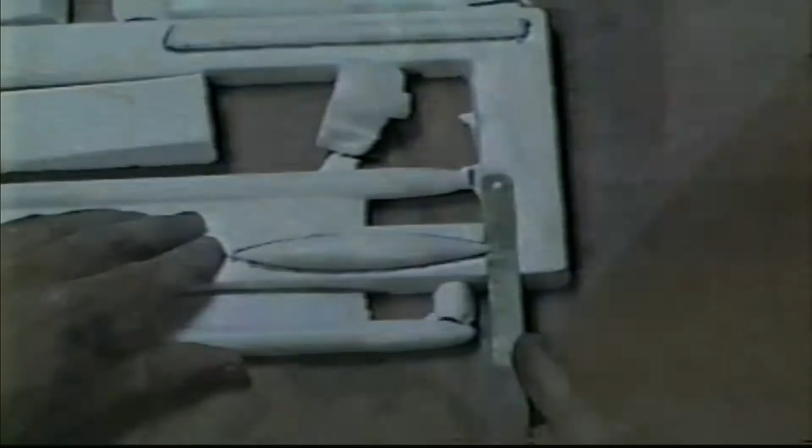Okay, let's cut the parts off. Let's start with our vertical. We're just using a regular old hacksaw blade. Alright, this is our elevator cap. The foam cuts real nice. Another elevator cap. Alright, there's our stick hand.

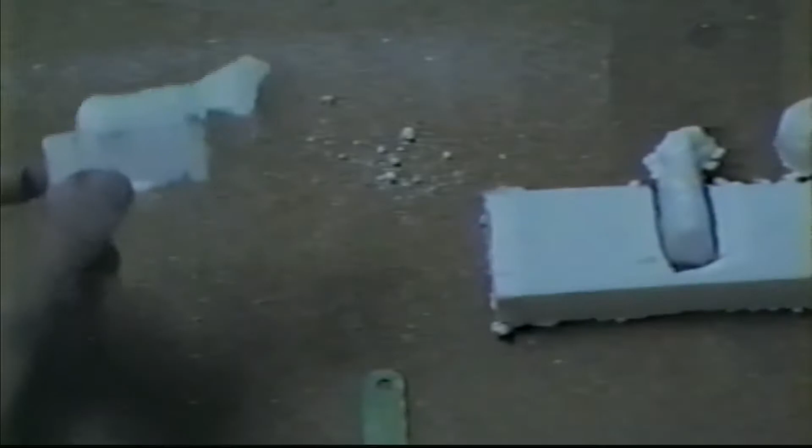Notice how we're cutting right next to the foam there. Alright, there's our line. We cut right there, and all we have to do now is just shape the arm. A little bit of sanding, and we'll have a cool looking hand.

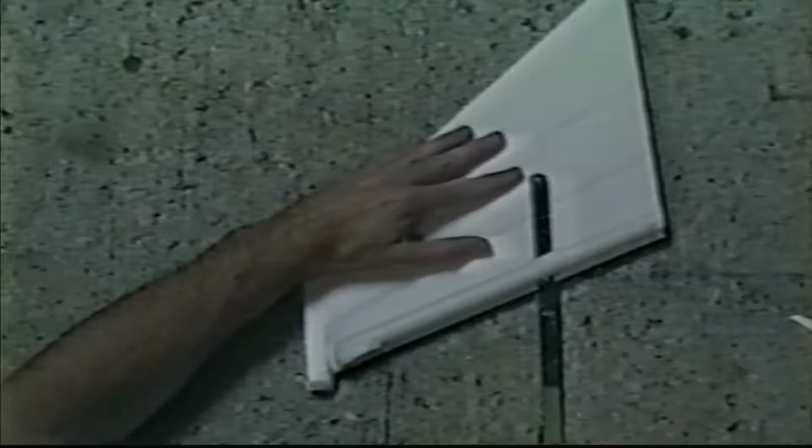Alright, let's cut the fill channels off our elevators. Careful you don't dig down too deep, because you're going to end up sanding it. We're using a 60 grit block with 120 on the other side. Cut all the fill channels off our ventrals.

And now let's clean everything up. Be real careful, don't change the shape here. That foam cuts real fast.

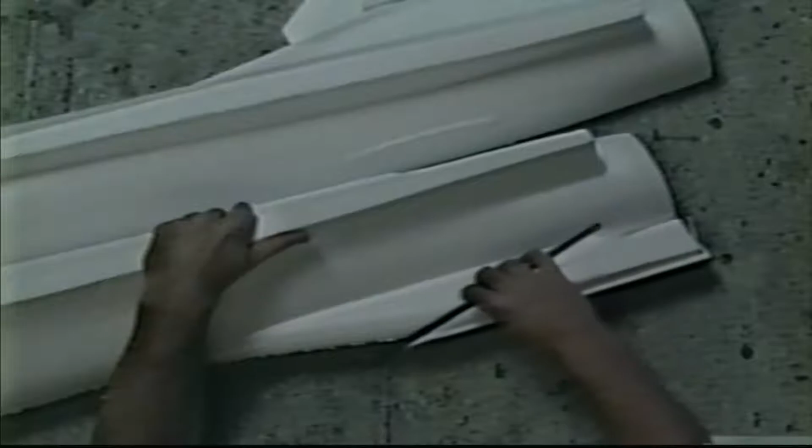Alright, any flash we have on the fuselage, let's go ahead and get rid of that.

Just a real light sanding. Alright, on the flat side of the fuselage, let's sand that up. We want that nice and smooth. Doesn't take much, just a little dab will do ya.

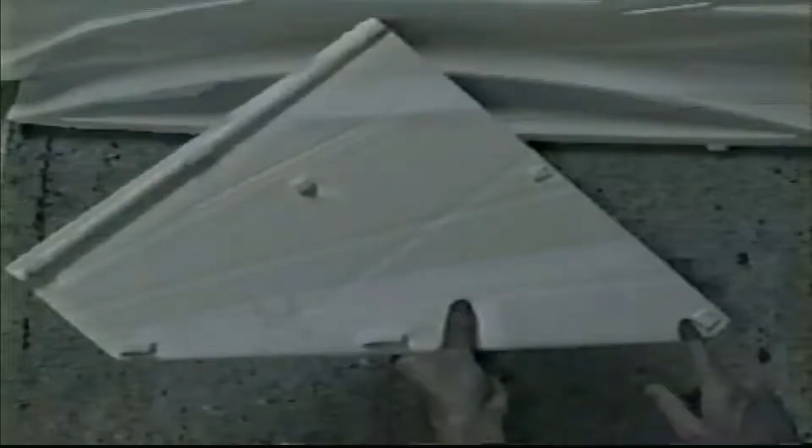Alright, these are our fuselage leveling blocks. Be real careful of these. Don't sand them off and don't cut them off. It's going to level up the fuselage later. Those are our wing leveling blocks. Don't cut those off either.

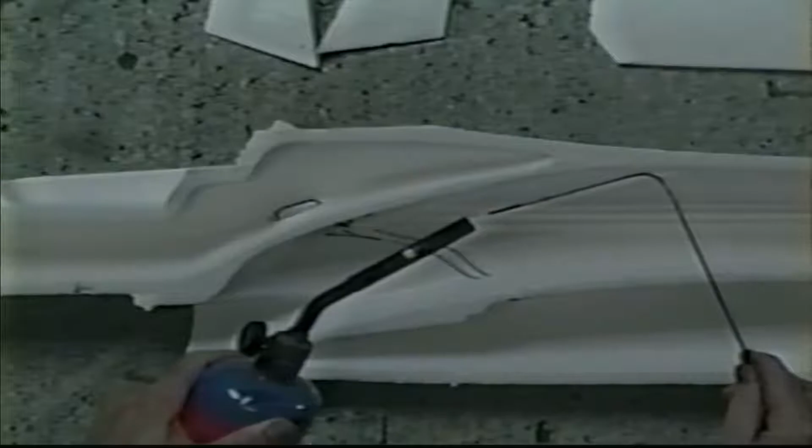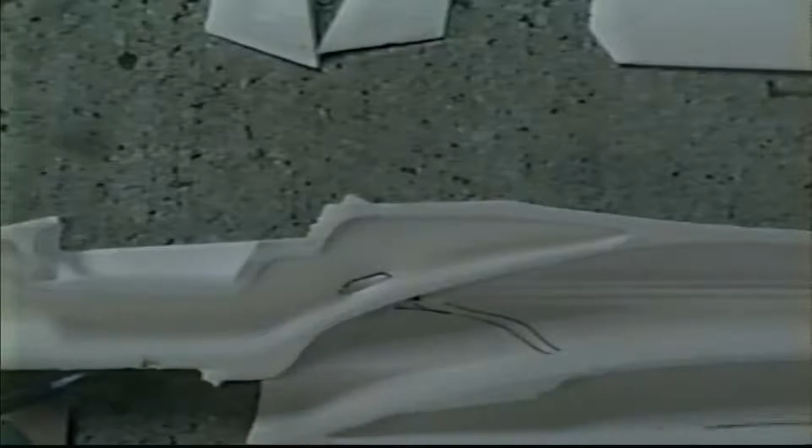Alright, using a torch and a hot wire, we got to melt some holes through the foam for our cables and our servo wire. Have a fan going for the smoke, as the smoke is kind of nasty. You got to be careful. You might want to test on some scrap foam because this foam cuts pretty fast.

Okay, this is for our fuel lines for later. We're working on the right side fuselage. We're going to melt all our holes right now so we don't have to mess with it later. Alright, melt them through for the cables on the other side of the fuselage.

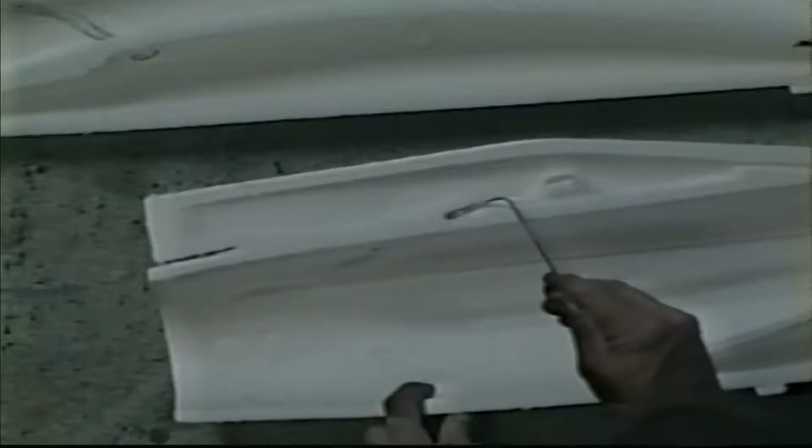Alright, this is our rudder channel. If you just get close, you're going to be in there good enough. Kind of just melt it all out.

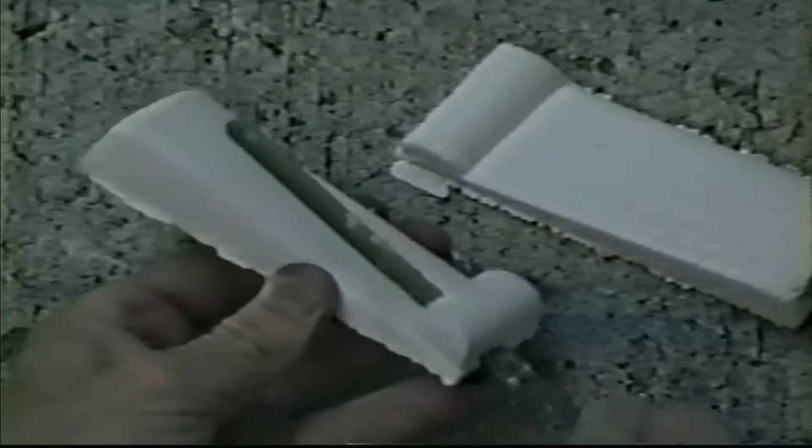Alright, let's cut off our fill channels for our air brakes. Note there is a left and a right side for these air brakes. Kind of clean them up.

Alright, using 5-minute epoxy, let's epoxy these things on. Use a ruler on both sides. Flatten it up and it'll be on. Okay, mark your center for your elevator and your aileron torque rods.

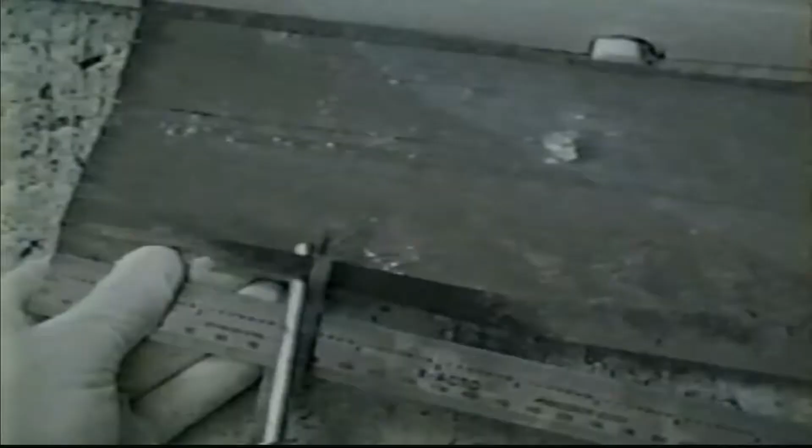Alright, check out this carbon fiber. This is some nice stuff. We got some Spectra string here also. Alright, that stuff is nice. Using your ruler, cut off some elevator strips and some aileron strips.

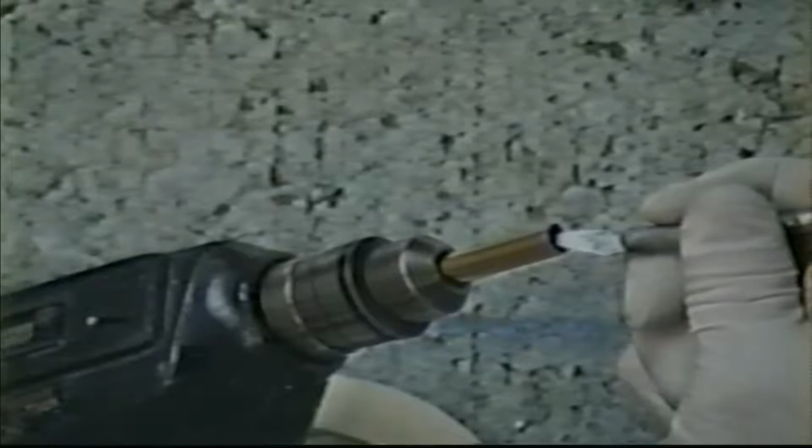Alright, using a 1/8 piece of brass, we're going to sharpen that sucker up with the X-Acto knife. And this is the large one for the elevator. That size is a 13/32. Alright, this is going to turn into a carbon epoxy bearing. We're going to build this plane tough, folks.

Okay, using 5-minute epoxy, let's spread some of that on the bearing here. Kind of squish it down real good. You want to get in between those fibers. Okay, place that over the hole that you marked earlier. That'll also lock in our air brake.

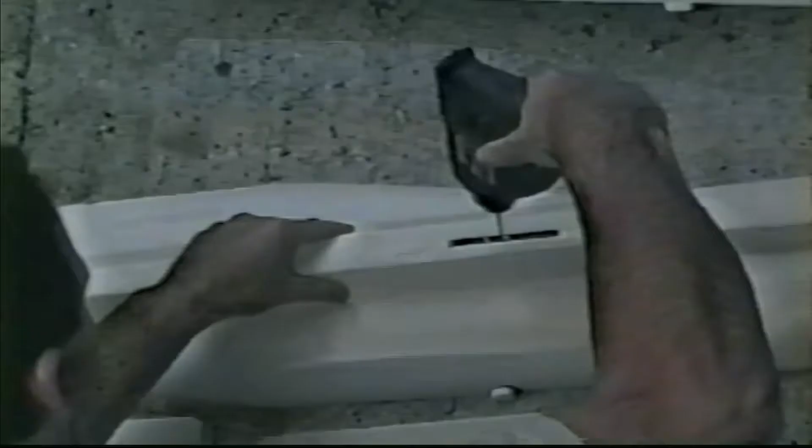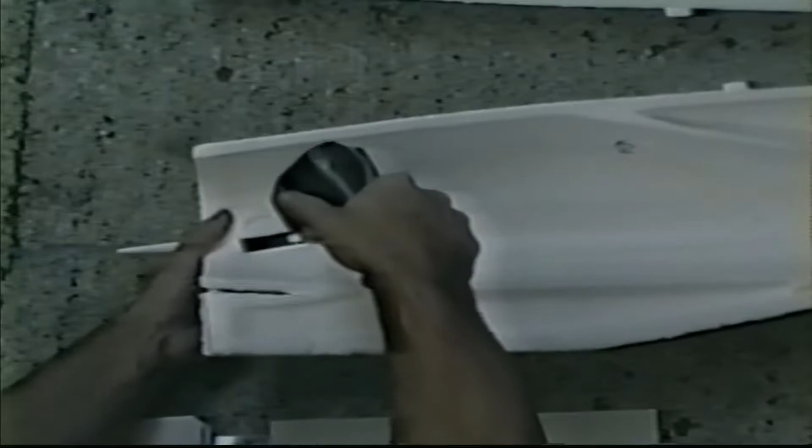Okay, we put them on our aileron holes. And now we can drill through our aileron. And using that brass piece, we'll drill through halfway on one side and halfway on the other side.

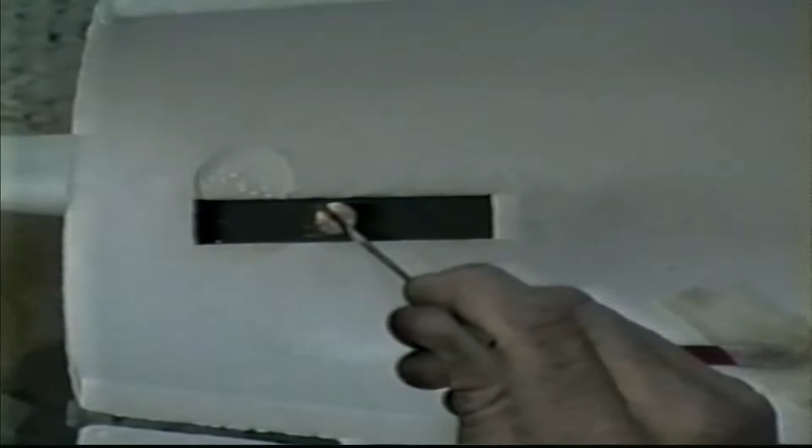Alright, heat up a scrap piece of 256 wire. Well, you don't want to get it too hot. What we're going to do is make a little channel in there right next to it, only about an 1/8 inch wide, and we're going to fill that later with epoxy. That's going to make our bearing attach right next to the carbon fiber. It's going to spread that load out.

Okay, using the diagrams, let's make our torque rods. We're going to make our rudder torque rod right now.

We're using the 440 wire, a brass tube, and an aileron connector. We're going to fit our brass over, and make our other bend here.

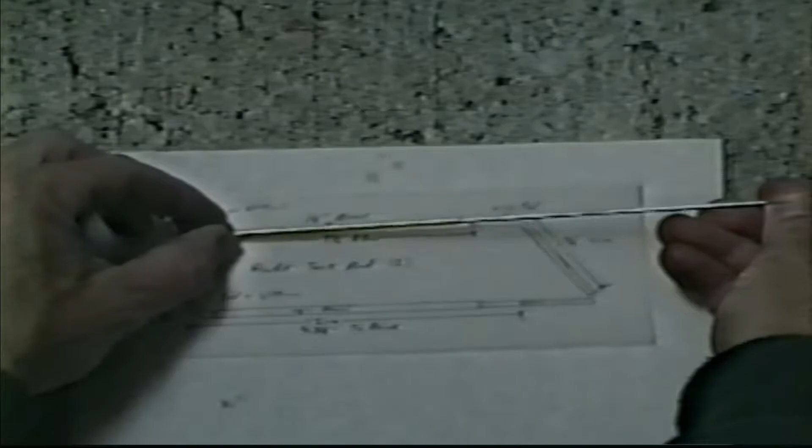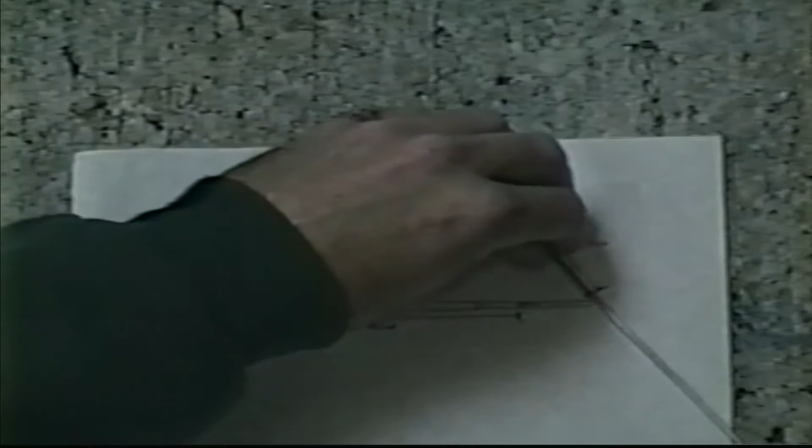Wire is fairly easy to bend. Look at there, not bad, huh? Make a mark, and use your cutters and cut it. Now you have a custom rudder rod.

Alright, let's make our aileron torque rods. Make 2 of those.

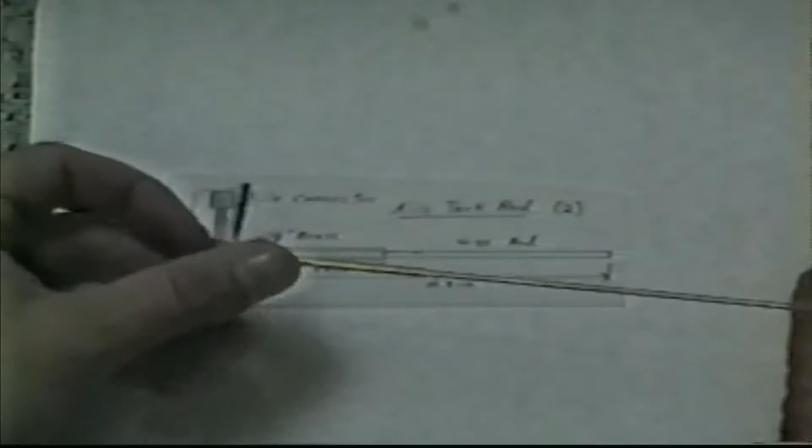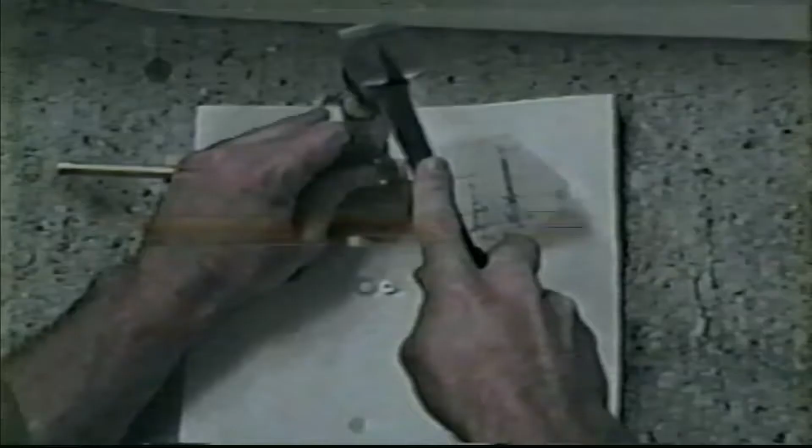Okay, we're going to make our elevator rod. The elevator tube is out of 3/8. Let's drill a hole.

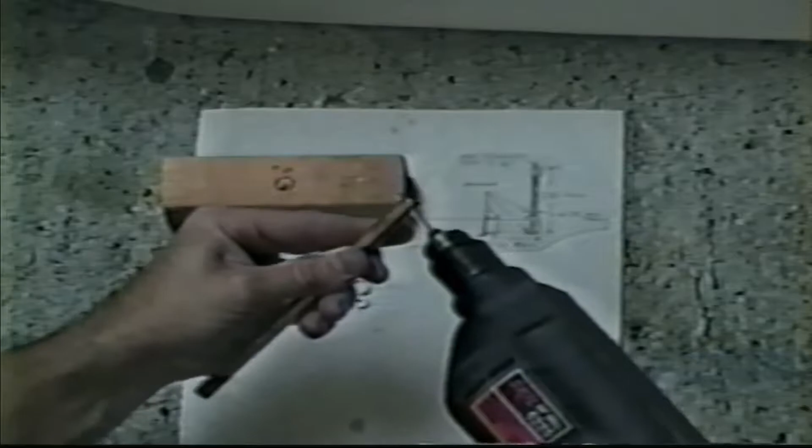Push our 1 3/4 bolt through, and we'll secure the nut. Don't tighten it down real tight.

Okay, we cut ourselves a little tiny sleeve from the 13/32 brass just to hold our thrust washer in place. You can see we got a mark on that elevator there.

Alright, let's solder up the nut and the bolt, and let's solder that sleeve to our thrust washer. Get a good solder, make sure everything's sitting just the way it's supposed to. If not, get a pair of pliers and straighten it out.

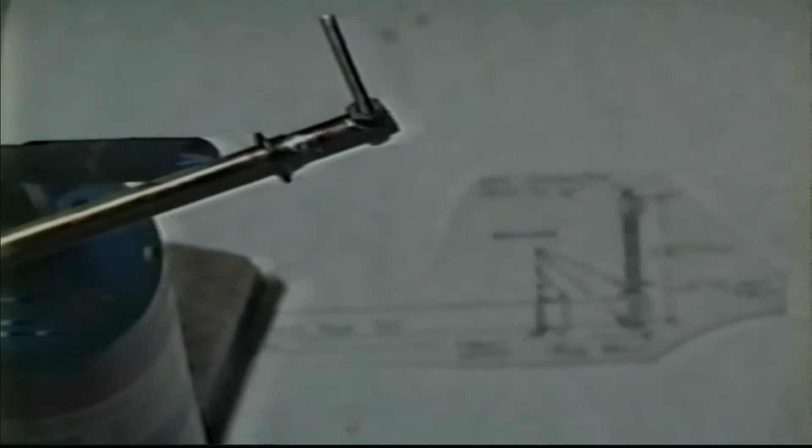There's our elevator rod.

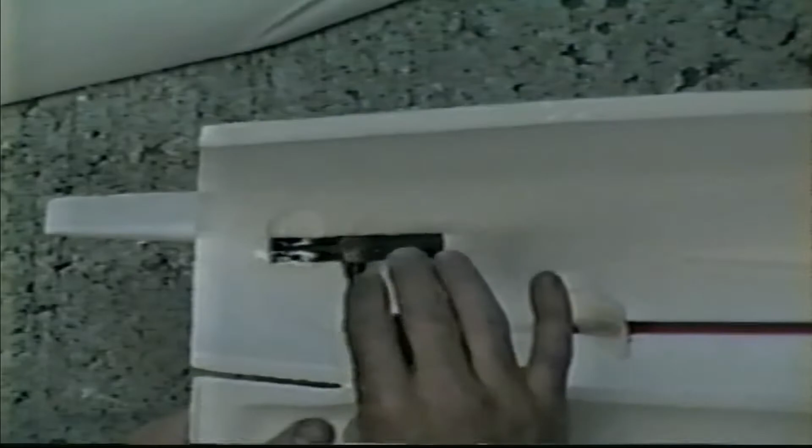Alright, we got to drill this out a little bit. Let's drop our elevator rod in there. Since that size was drilled out, it should just fall in and fall out.

Alright, let's add a little grease to our thrust washer there, and to the elevator tube, right in the end there. Smear it all over because we're going to pour epoxy on this later.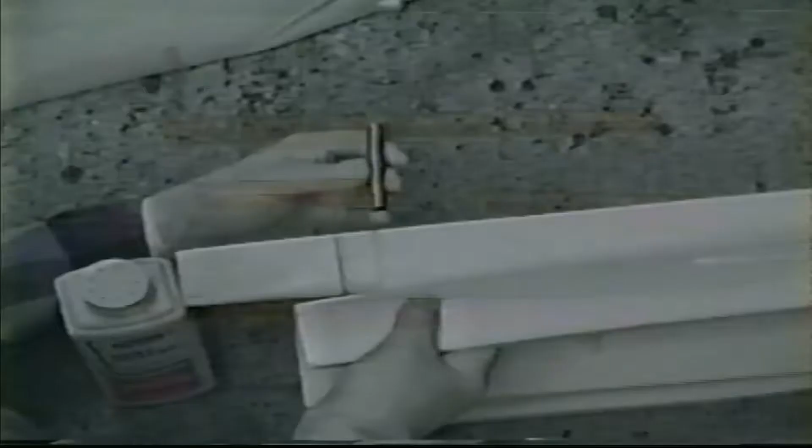Okay, we got our rods plus our 13/32 rods that go in there halfway in the fuselage. And let's push our 3/8 elevator rod in there. Now that brass rod on the outside will center us up in there, using that carbon fiber as a path.

Alright, we used 5-minute epoxy and a little bit of baby powder here, and we're just going to drip it on right next to our bearing, our thrust washer there.

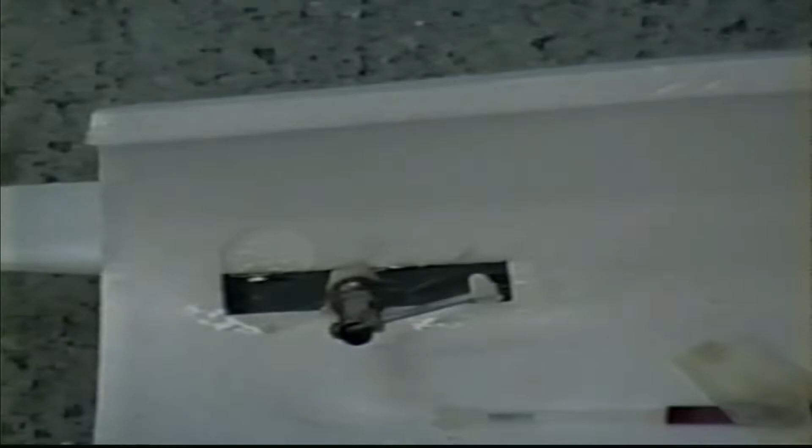This is going to give us one of the most awesome bearings. Alright, push that in till it stops, and then let's just wipe off the excess. You're now, for the most part, done with this side, as far as the elevator goes.

Alright, let that dry, and let's work on our ailerons. Grease your rod up, the entire rod, and go ahead and get your brass tube, put it over that 440 rod.

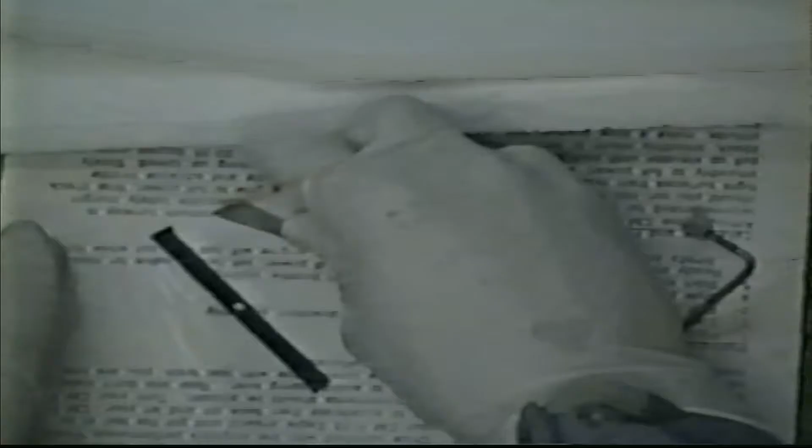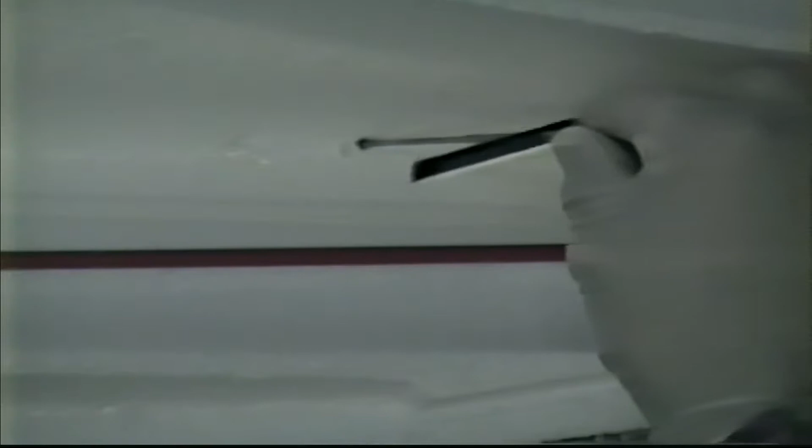Alright, we're going to use a little 5-minute epoxy again, spread it on your aileron carbon fiber. Go ahead and slip that over your aileron and fit that right in the hole that we drilled earlier. And there we go.

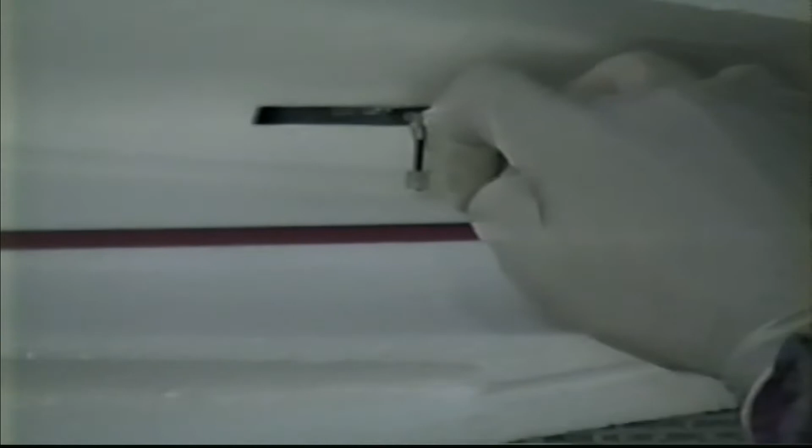Make sure that thing comes out real nice and straight. And just a little bit of brass there will be hanging out.

Alright, let's break our elevator rod loose, and we'll take off that outer brass.

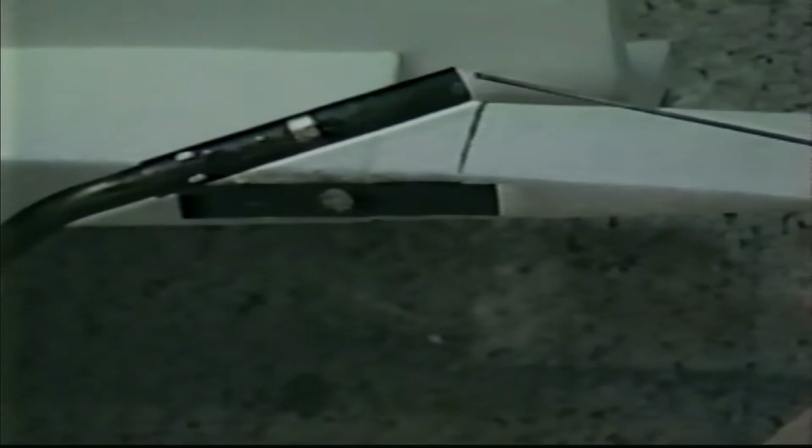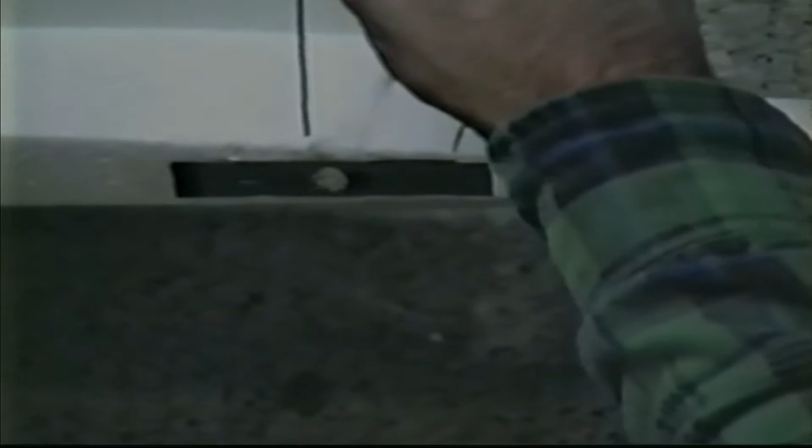Okay, we're going to heat this up, and we're going to make it so we can drip some epoxy in there. So just go right where our bearing was, or our cutout earlier. Okay, just make a little slice there.

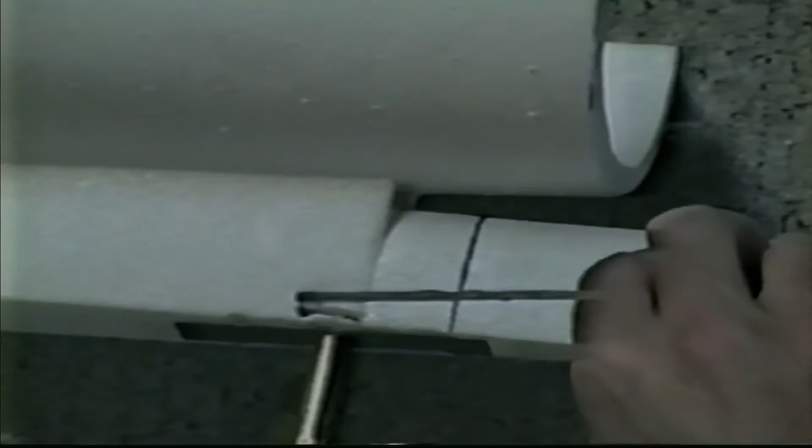We're going to fill that whole area up with 5-minute epoxy. You may need to heat the epoxy up so it flows real nice. Alright, let this dry.

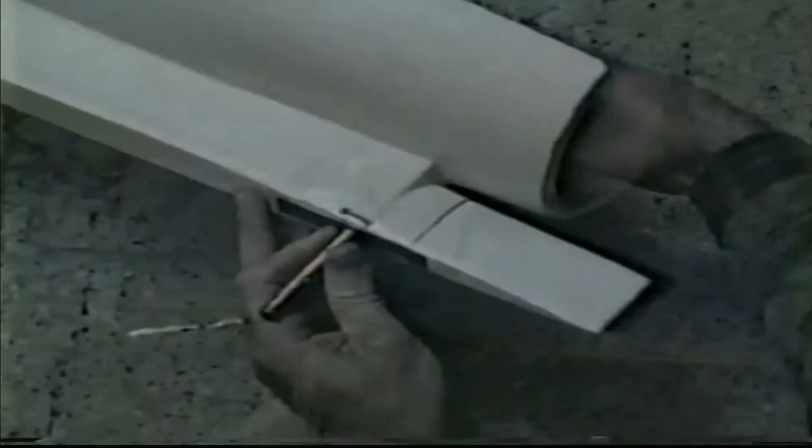Okay, once it's been drying for about 15 minutes, let's break it free. You can add a little oil on there so it slips real nice.

You now have a perfect fit carbon fiber epoxy bearing. Add just a little bit of oil, we don't want to drip too much in there. Look at that, that's going to be nice and smooth and tight.

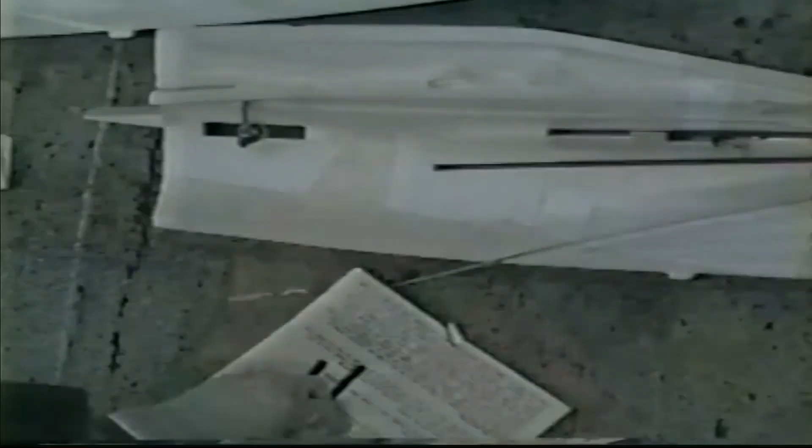Okay, get a couple of small pieces of carbon fiber, and we're going to put it right underneath where our torque rods are going to go for our rudder.

Okay, we had waxed up our rudder torque rod, and now we're going to put a little epoxy on there, and drop it in right next to the carbon fiber there.

You can dab a little epoxy in there, but not too much, just to lock it in. We'll later put carbon on the other side, and that'll really make that thing solid.

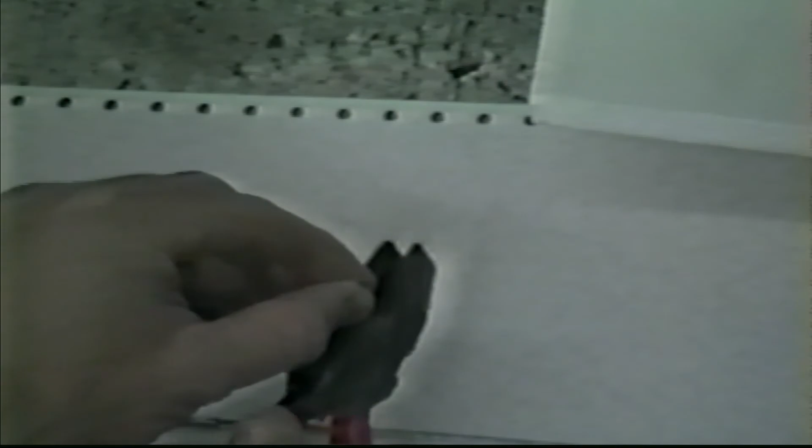Okay, we got our all threads, we're going to conserve and cut them in half. Hook up your nyrod, your clevis, in a snap link, and solder one end to your steel cable.